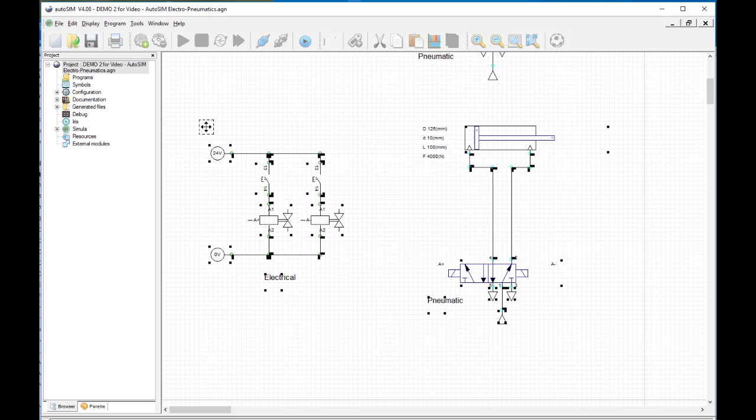All right. Now, before I get started, I want to make a couple of changes. First of all, with the electro-pneumatic circuit, the labels here, A plus, A minus, and A plus, A minus over here, if I create another valve with the same labels, it's going to respond when I am working with this circuit. So I'm going to have to change those to a different letter, and we'll just go along with the alphabet. I'm going to call the next actuator B.

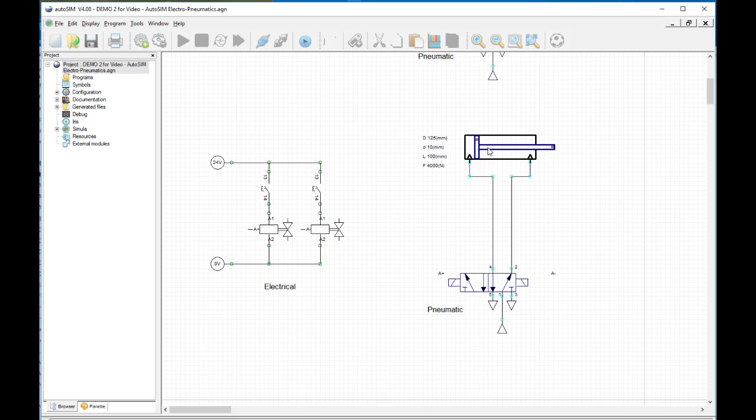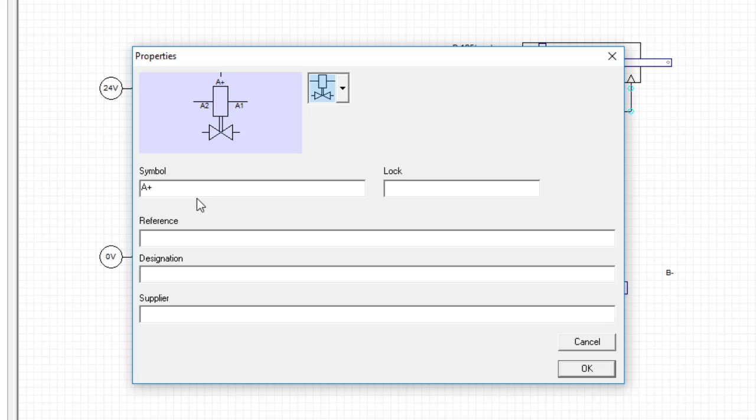So we're going to change the label, just double click the valve, and this A plus, we're going to make it B plus, and oops, I should have changed the other one, and the A minus is going to become B minus. And then the corresponding solenoids in the electrical, we do the same thing. B plus for this one, and B minus for this one.

All right, this circuit is going to act like the second or third circuit from the pneumatic one, where we're going to have one button instead of two buttons. We want to have one button. I'm going to press the button. The cylinder will extend, but it's going to hit a sensor, and the sensor is going to automatically cause it to retract. The sensor is going to take the place of this second push button.

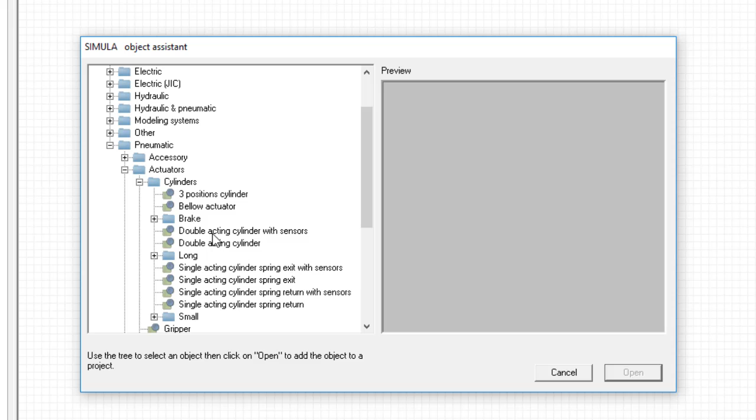So I need to replace this cylinder with another version which has sensors. So add an object, go to Pneumatic, Actuators, Cylinders, and we're going to go to Double Acting Cylinder with Sensors. And we'll just put it right here where the other one was. So I have a cylinder with two sensors.

These are representing magnetic reed switch sensors or some type of proximity sensor that senses when the rod is extended or retracted. And then we're going to use at least one of them in this case to replace the manual push button. And so we're going to use the same labeling convention as the HAS200. We're going to call this actuator B, and we're going to call the sensors B0 and B1.

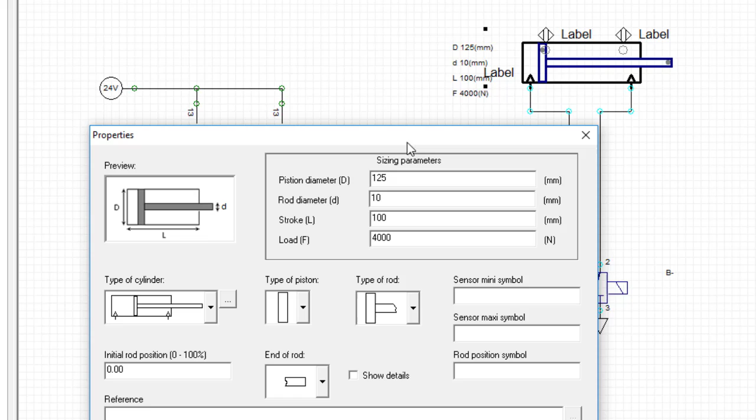So first I'm going to just double click this. Also I'm going to get rid of these extra little labels here, or this data that we don't really need to see. So I'm just going to uncheck show details. Okay, so for the labels, I double click this. I'm just going to change this label to B. So that's going to be actuator B. Now the two labels on the sensors don't have any functional properties.

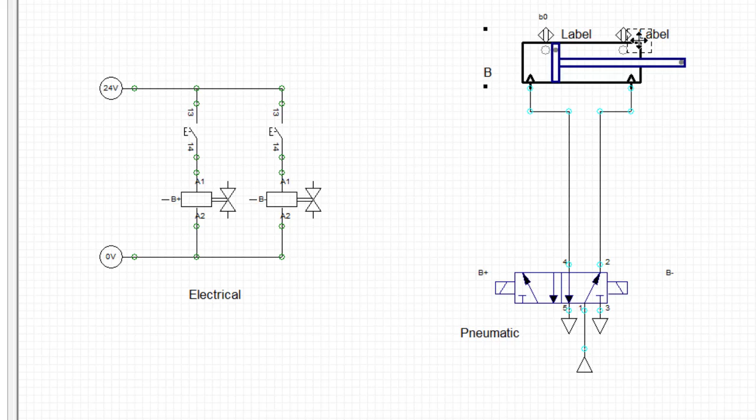They're just text labels. What I am going to do though is if I double click the sensor, where it says symbol, I'm going to put B0 for the left sensor, and I get the label here, B0. And then same thing with this. I have to highlight the sensor first and then double click it, and it comes up with symbol. So this is going to be B1. And those two labels, I'm just going to delete them, or just make them blank text. We don't really need them at this point. So we've got a cylinder labeled uppercase B and two sensors labeled B0 and B1.

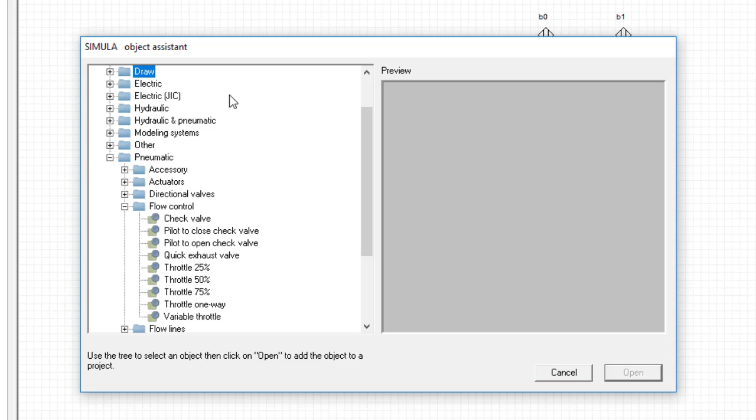Now we're not going to use both of those. We're just going to use this sensor, and we want to insert it into the electrical circuit in place of the manual push button. So I'm going to delete this. So we're going to open the menu, add an object, go up to Electric, Contacts, and we just need a contact normally open. And then I'm going to rotate that so I can put it right in where the switch was. So now I need to associate this contact with the B1 sensor.

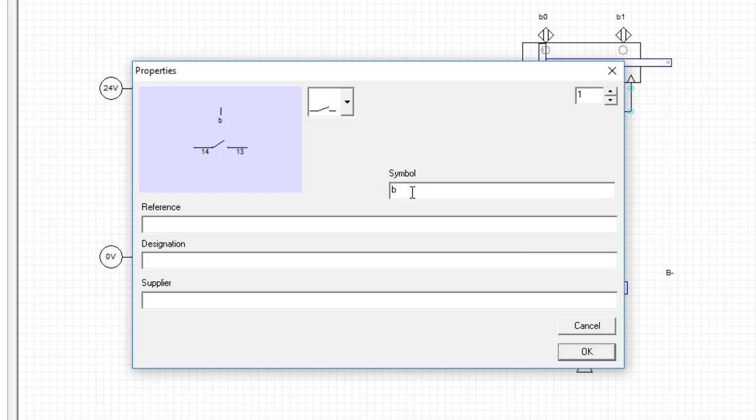So I just double click it, and where it says symbol, I just put in the same label as we have on the sensor, B1, and that is associated. One other change I'm going to make is to put in some flow control valves to make this a little more interesting.

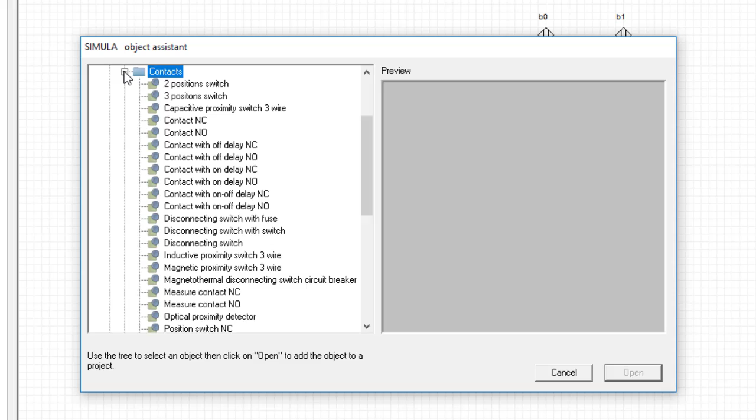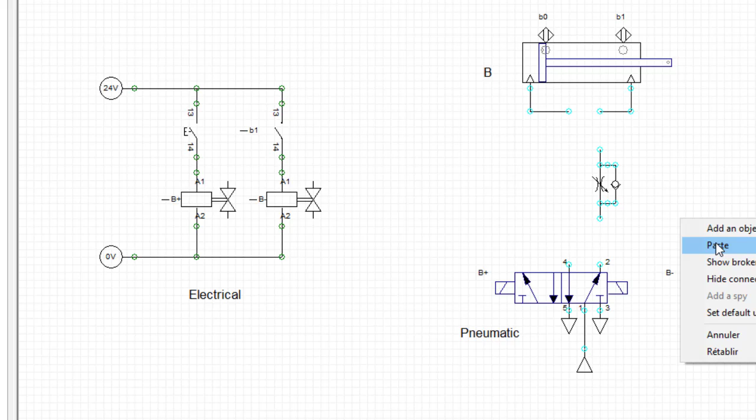So I'm going to delete these lines, go to add an object, back to pneumatic, under flow control, throttle one way. Put one in, this is going to control the extend speed. Make a copy of that, and we'll mirror it, and that'll control the retract speed.

So when you run the simulation, make sure to click this play button, the run button. I wasn't doing that before, and sometimes it runs fine without that. I'm not sure why, but I know in this case when we have the sensors and the associated contacts, sometimes it doesn't run properly if you don't hit the play button or the run button. So I'm going to hit that first, and then also the soccer ball to start the full simulation. And at this point it should work properly.

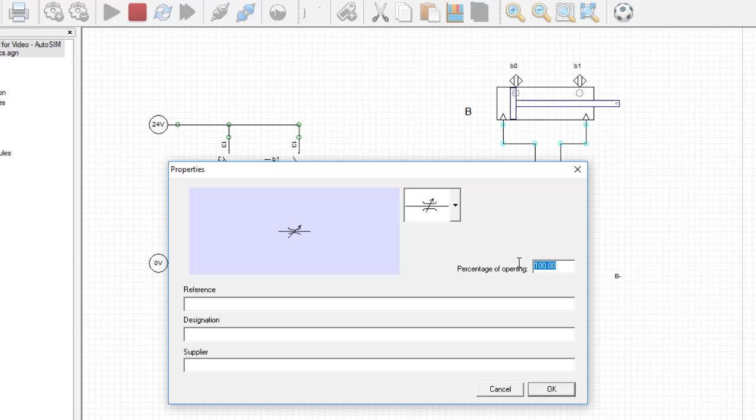So I click the button, it extends, and then automatically retracts when it hits the end sensor. Okay, and I can also make this a little more interesting by changing the retract speed or the extend. I'm going to put this at 40%, so we'll have a quick extend and a slower retract. There's a quick extend and a slower retract.

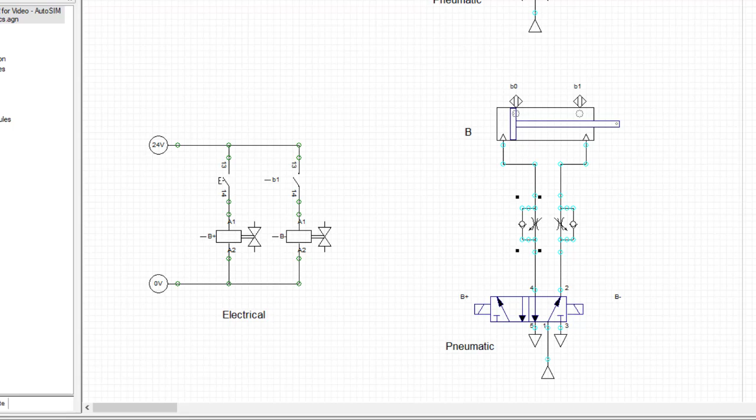So that is the electro-pneumatic version of the second pneumatic circuit that you did in Virtual Lab 2. We have one more circuit to do, the third one, which is going to be like the last pneumatic circuit, where it should automatically extend and just keep retracting, extending, retracting, extending. Now the third one, I'm just going to do the same thing. I'm going to copy the circuit, and scroll down and paste it.

And once again, I need to change these labels because we already have sensors and solenoids labeled with the B designation. So this is going to be C. I'm going to make this actuator C. So let's start with the label first, uppercase C. And then each of these sensors, you double click and change the symbol. This is going to be C0. And this is going to be C1.

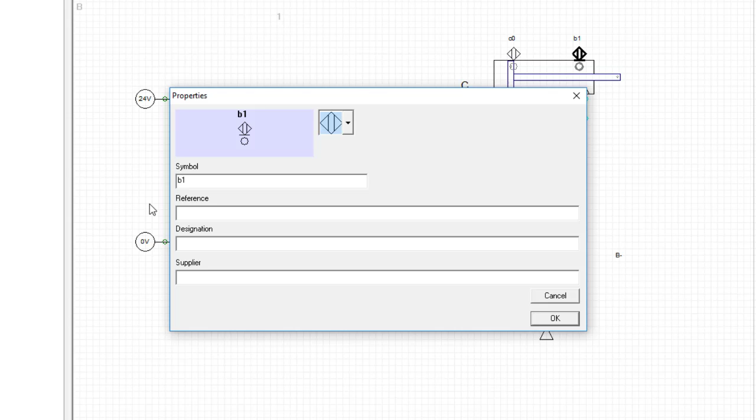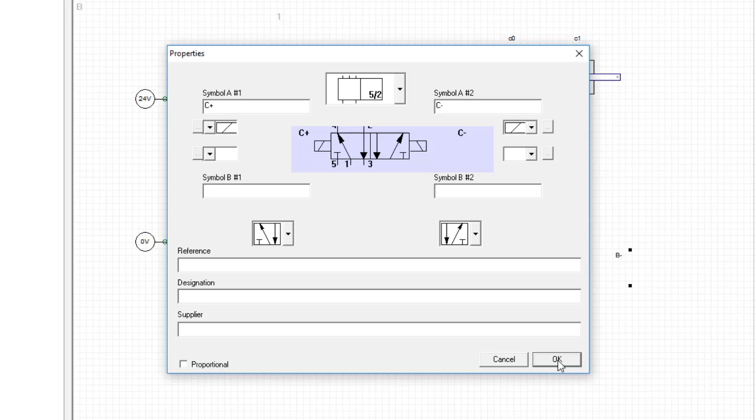We also have to change the valve labels. Double click the valve, uppercase C plus for the extend, and uppercase C minus for the retract. And make sure it goes into the retract position before you say OK. So that'll be its default position. And now we have to label the electric actuators with the same label. So everything has to match.

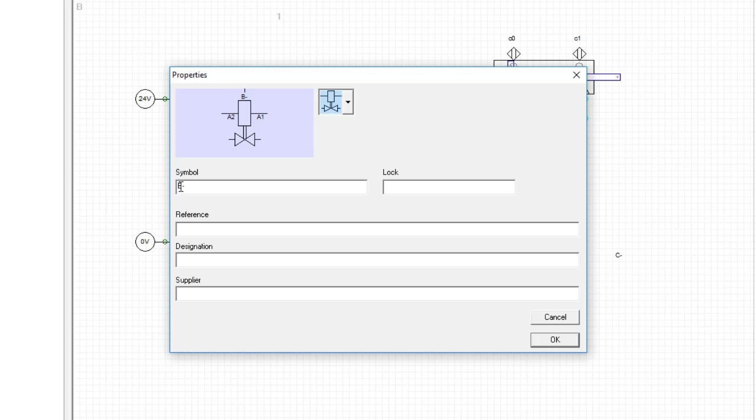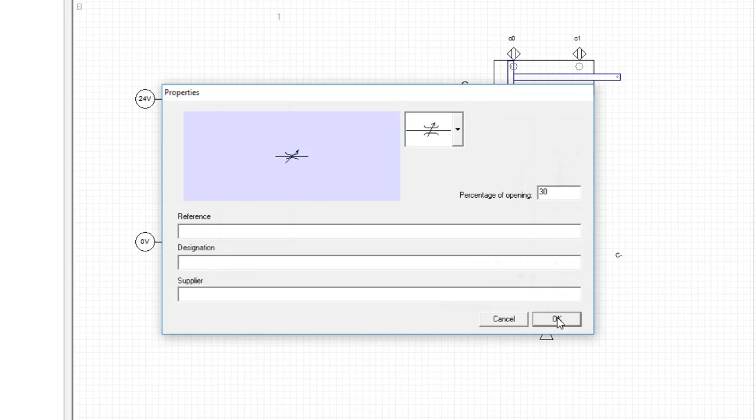So C plus for the solenoid to extend it, and C minus for the solenoid to retract. And then this sensor also has to be labeled C. So what we're going to do now is make this a system that automatically extends and then immediately retracts automatically, and it just keeps going back and forth. So to make it a little more interesting, I'm going to change the flow control on the extend to something slower, like 30%. So it should do a slow extend and a quick retract.

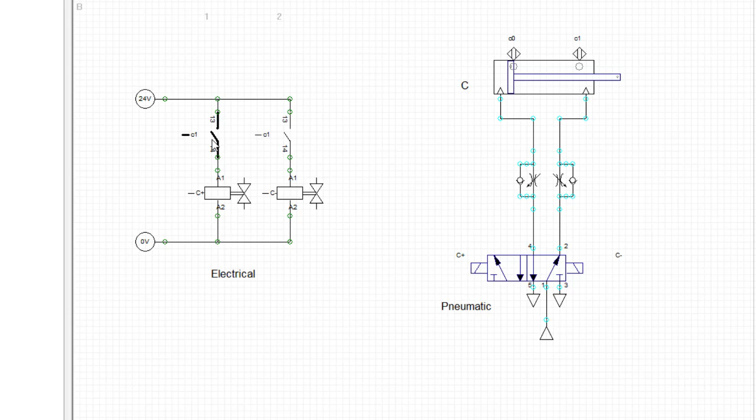So all I have to do is replace this manual push button with a set of contacts that can be associated with the C0 sensor. So I right click, copy, paste, and then I just have to double click it and give it the symbol of C0. Just hit the soccer ball. Now what you should see is it's just going to keep extending and retracting. You notice you have a slow extend because of the flow restriction and a fast retract.

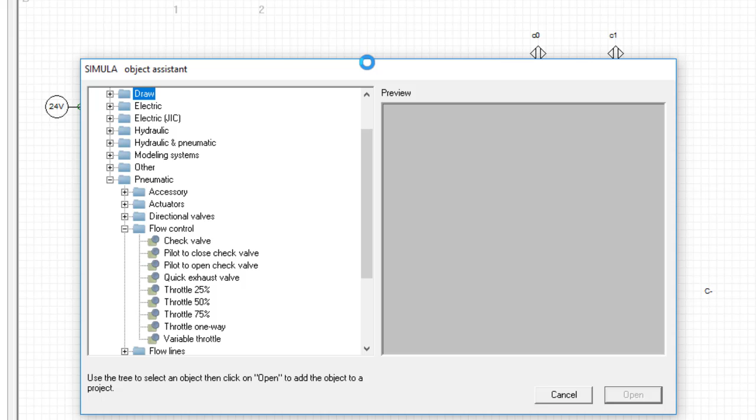Now what I'd like to do is make it so I can actually have some control over it, so that I can start and stop, just like the pneumatic version. So I'm going to stop the simulation, and I just need to put in a switch here. So if I right click, add an object, go to electric, contacts, and down here a switch, normally open. Connect that up to power and to the circuit, and then I'm going to label this main control. So I'm just going to grab one of these text labels, copy it,

start the simulation. I hit the main control switch and it starts doing extend and retract.